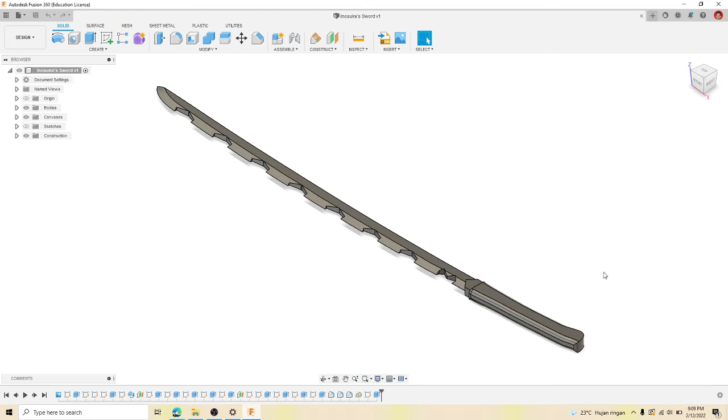In this video we're going to talk about giving this sword color and texture so we can make it more presentable to people and make it look much better than the basic one.

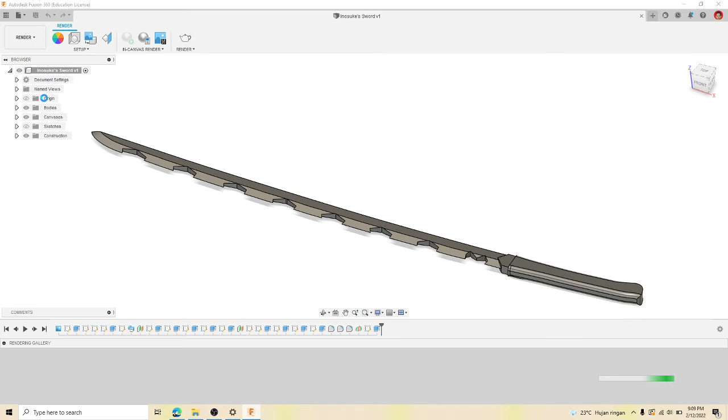So we already have this model, right? Sometimes I like to edit the appearance in design mode, or maybe we could switch to the render options right here. It takes a while. Sometimes you can move straight forward to the render options and then click appearance.

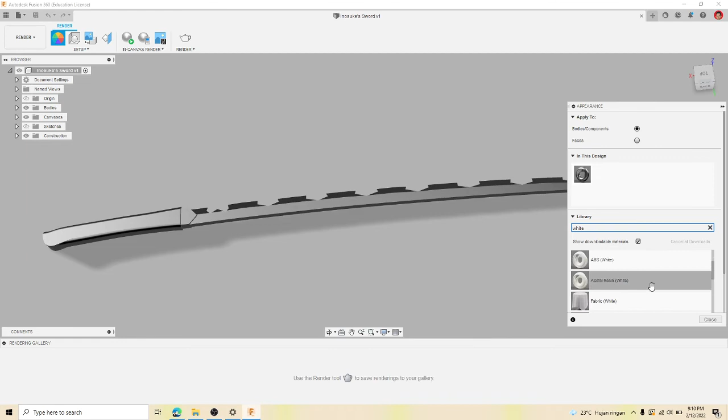Let's assume it has a white color, so just type right here, white. We have a lot of material here like ABS, acetal resin, fabrics, and some paint. I'm going to take some nylon here. So there it is, you got a white handle now.

Now let's see the reference, okay? Click image - my internet connection isn't really good, my Microsoft Edge isn't really good, so sorry for that. Basically, the sword has a white handle because it has a wrap on it, but we aren't going to make a wrap because it would take a long time to draw. Just like this, you can see that.

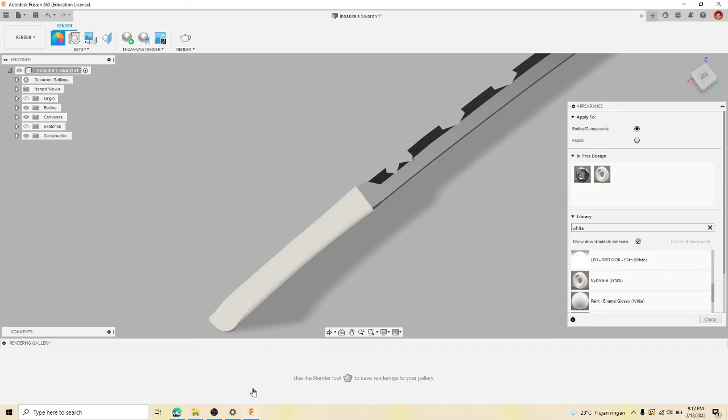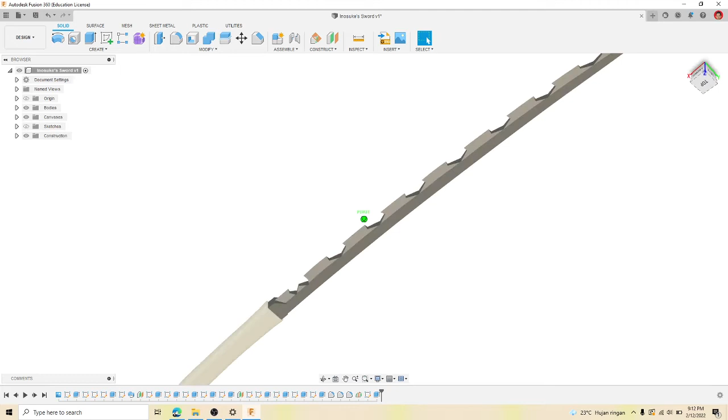So we're going to give the texture to the handle only and the steel. It's not only done in render, you can also do this in the design options. It still looks pretty good, but it takes less performance for your laptop so it's not slow - it could make your laptop slow in case you don't have a really good laptop just like me. It's the basic one.

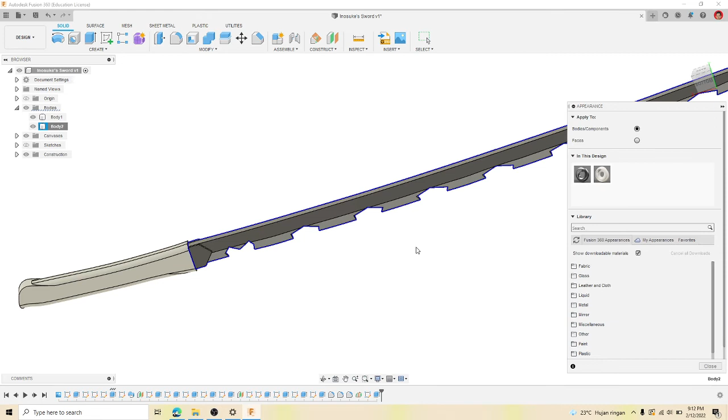So let's click the body. Let's right click the body right here, click it and click appearance, or you just type A. But sometimes I don't remember that I could do that. So we have this sword because we really wanted to make the body a different color. We should click these options, face, and then type some material that you wanted. In this case, I wanted to use metallic.

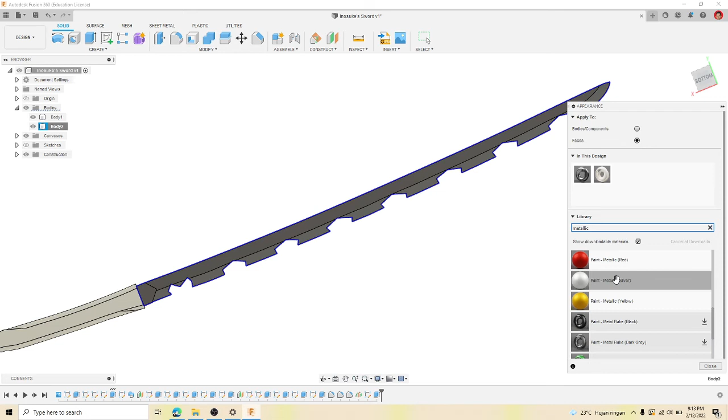Okay, so we got the options. I'm going to give metallic silver to these faces. So let's give it - it's kind of hard to do this.

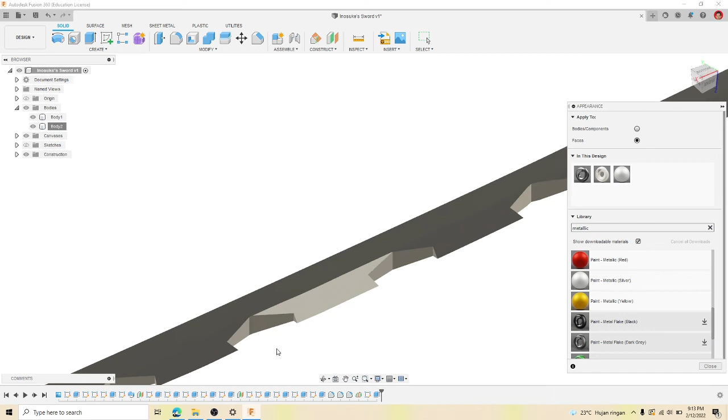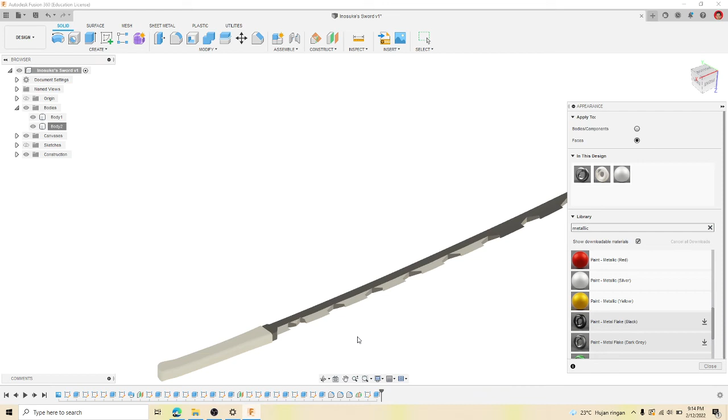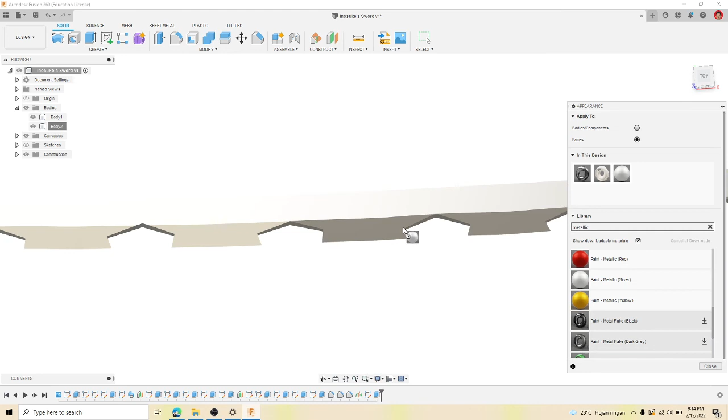As you can see, it's different from the rest of the body, and we apply it to the other face that we wanted to make silver as well. It's like this, it's pretty easy. Okay, just like that, just like that. Now the other side. It's just like painting in Corel Draw, but making it 3D. It's quite fun, I guess.

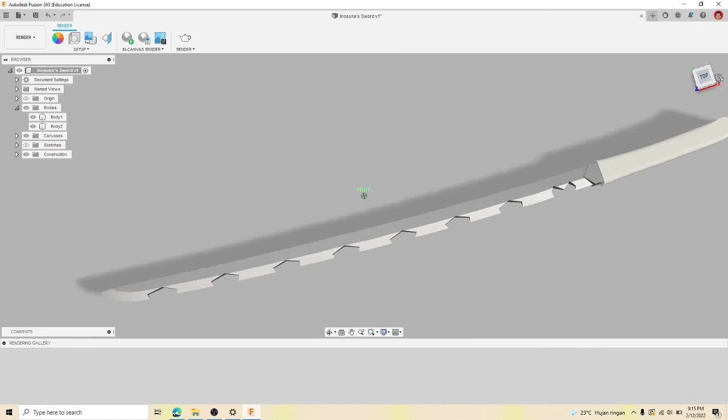So it's done with the sharp side, let's see the render. Now we got the silver sharp side. But I wanted to make the other side, the non-sharp sides, look more glossy, so we're going to try to apply another material there. Just go to the body, appearance, or you just type A.

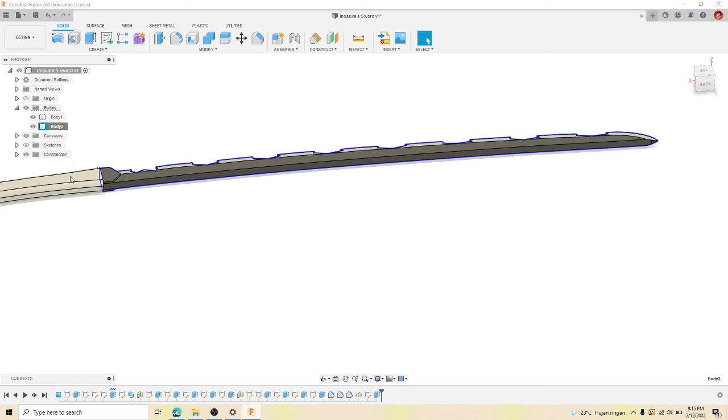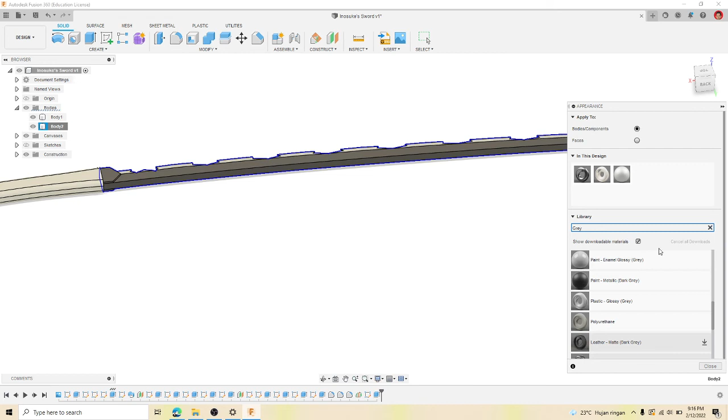It's much more simple, but I'm not really used to it. So we're going to need to apply maybe gray - I don't know exactly what's the color, I don't really remember. It's kind of gray, right? But sometimes it looks like black, sometimes it looks like gray. I'm going to use dark gray maybe, gray. So use this metallic dark gray, and I'm going to apply that to this face.

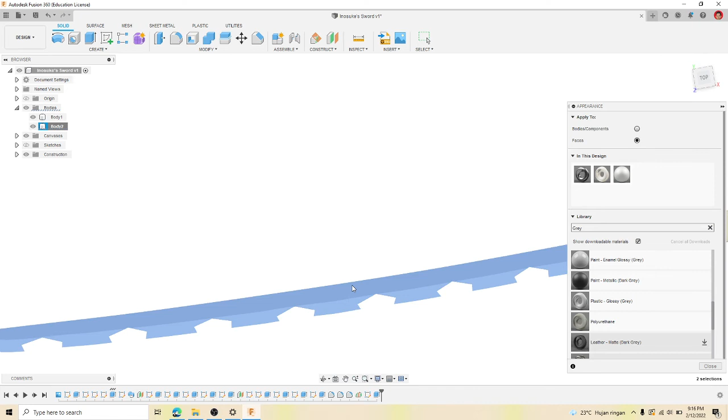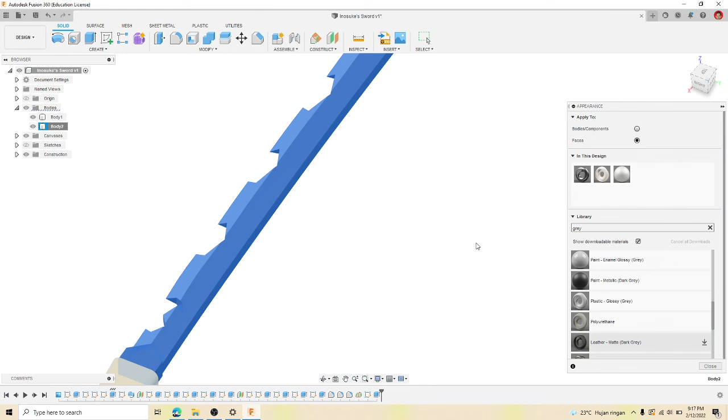Wait a minute, so it's gray - the metallic one should take on the face first, and then wait, once it's stuck on the face, always get the body. Maybe I'll just click here and repeat appearance. Okay, gray, metallic gray, I'm going to apply here. Okay, that works.

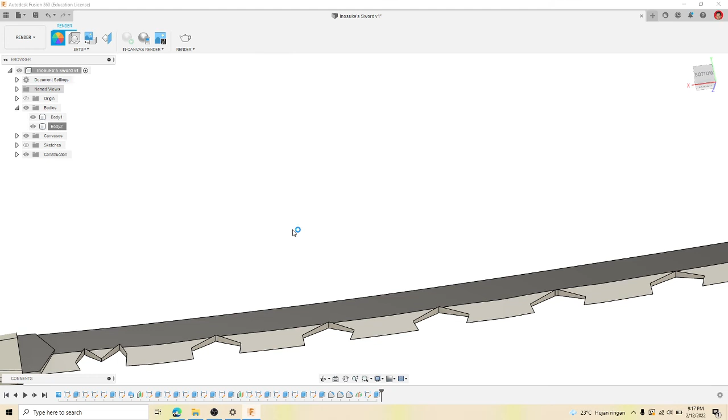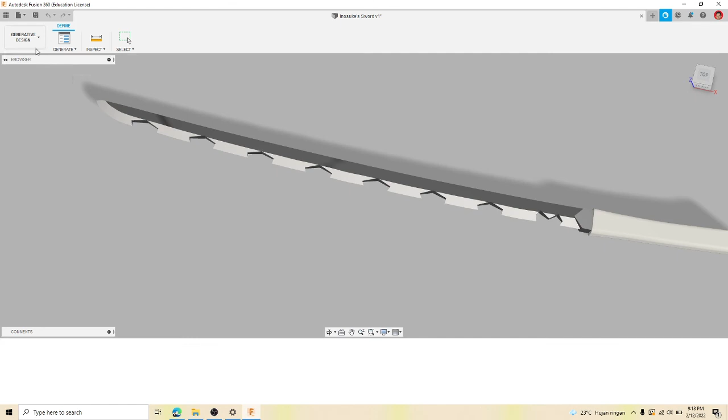Let's check the render. This is the dark gray with the metallic one, and this is the one without it. Oh sorry, I didn't mean to click the generative design options.

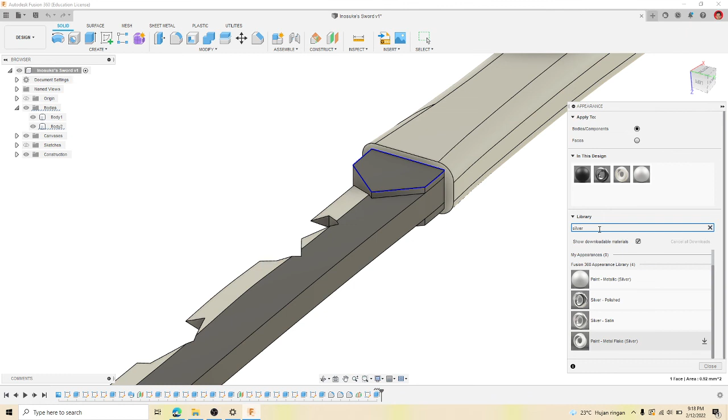So now we are painting this with maybe a silver one. Just going to click this face and press A. Okay, and then just look for a silver material. I'm going to pick this silver polished material to apply to this face.

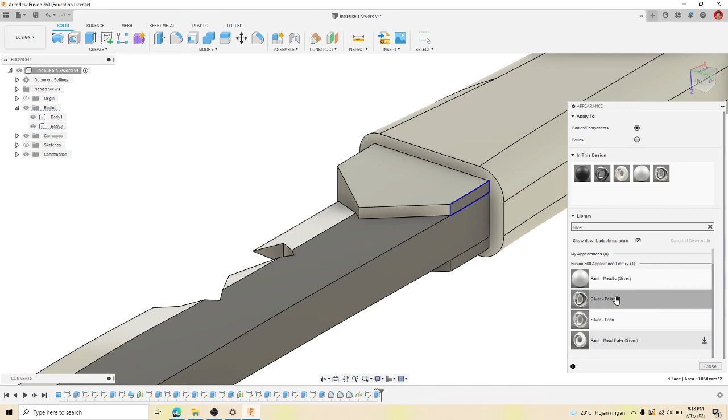Click it first to make it easier to drag, like this, applying this to this face here.

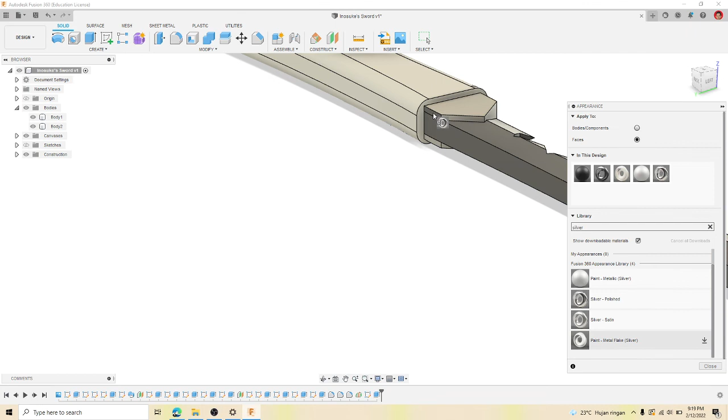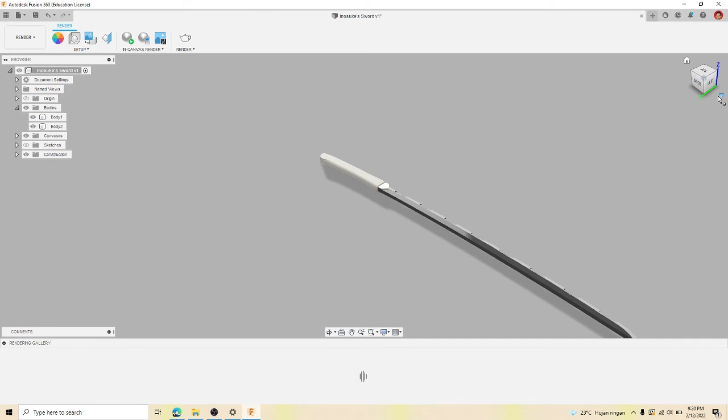And we're done. We got all the color that we want and the material, of course. Let's move to the render options and see our sword here. This is a really basic tutorial, so I hope you didn't have really high expectations - this is all I can do. So yeah, thank you for watching.

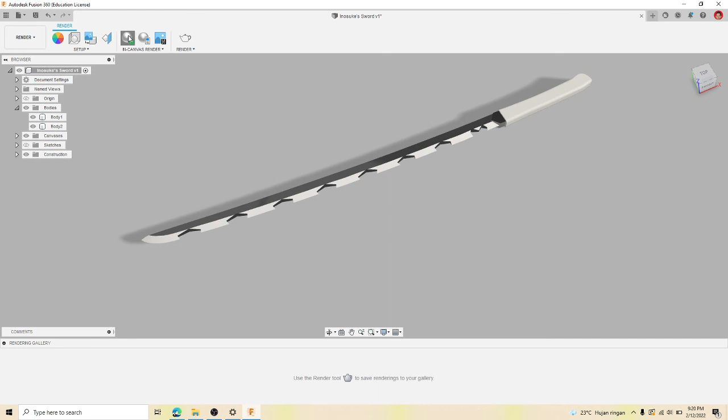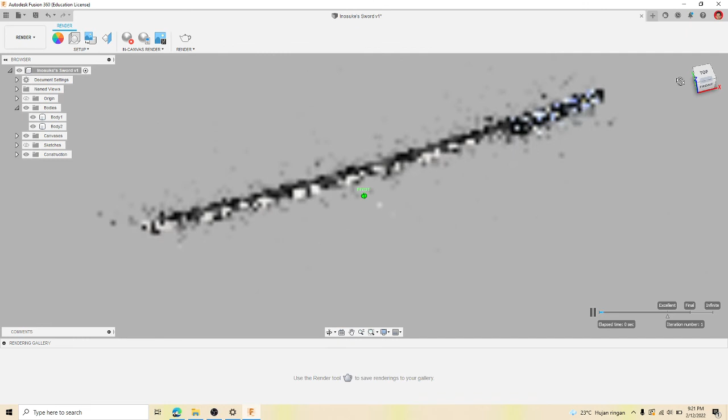So here is your Inosuke sword in Fusion 360. Let's try rendering it in canvas render like this, because otherwise it will slow down the process. You shouldn't really want to move the angle in canvas, because I use the in-canvas render setting, and then when it's...